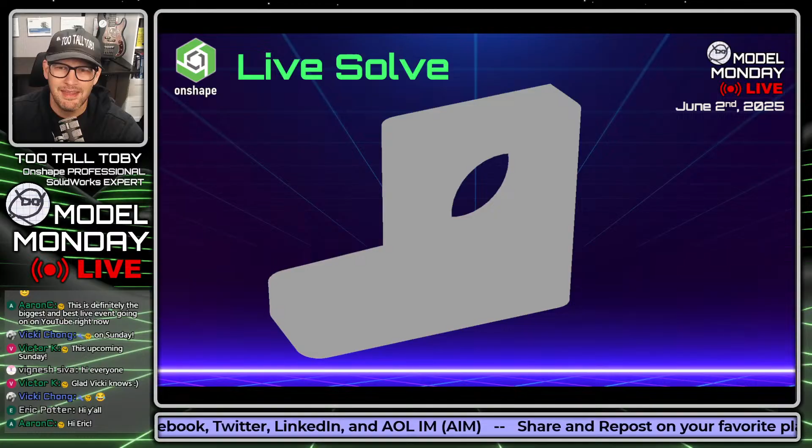Today, we're going to do a live solve. Here's a little preview of what that live solve is going to look like. We're going to do that in the second half of the show.

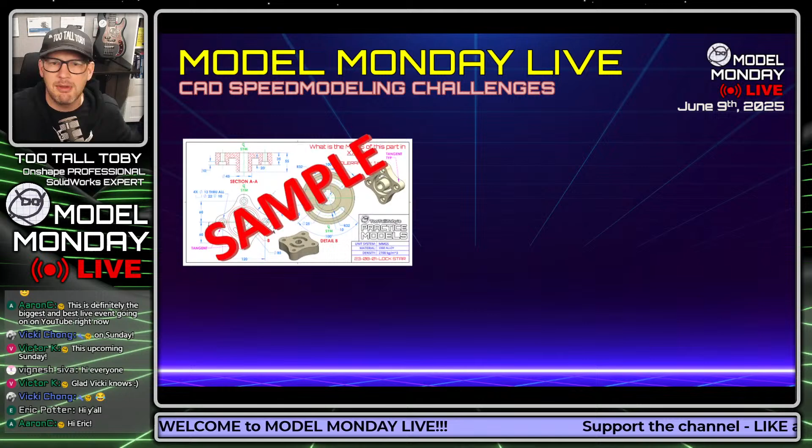Our first order of business is just to remind anybody who's new here how these challenges work. So what's going to happen is I'm going to show you a 2D print, and you are going to try and turn that into a 3D model.

What's up, Marcin? Welcome, welcome. Says hi, all. Hello, hello, welcome. Thanks for joining us here today.

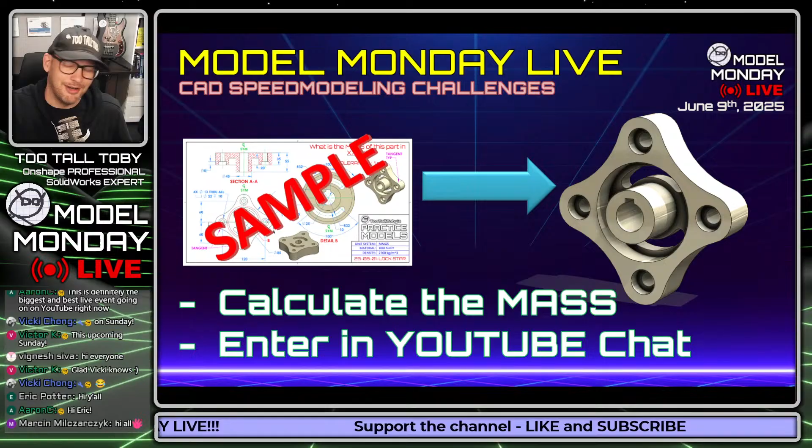You're going to try and calculate the mass of that model, and you're going to enter that mass directly in the YouTube chat for the first part of the show. Then in the second part of the show, we're going to do things a little differently. We'll talk about that in just a moment.

Of course, you can use any 3D CAD package as long as you can input density and output mass. One of the things that makes this channel so novel is that it is truly CAD agnostic. So any 3D CAD packages are welcome.

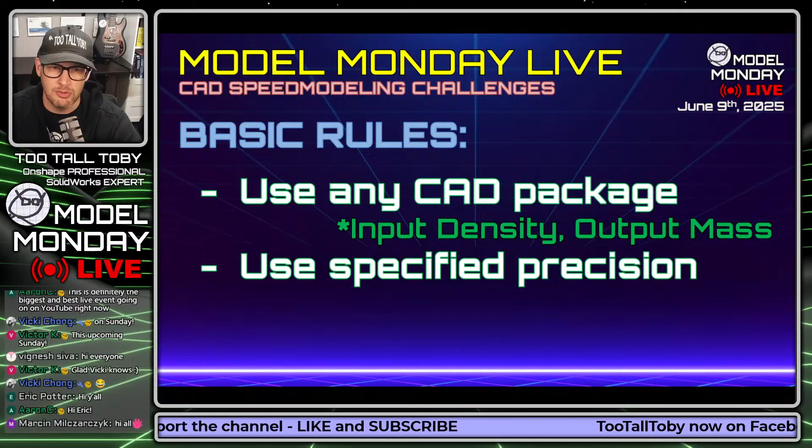And of course, use the specified precision when you answer so that you can get credit for your answer. The first correct answer in the chat will be declared the winner. And the materials that we use here are in inches and millimeters, and they are plain carbon steel, 1060 aluminum alloy, ABS, and red oak.

You got to make sure that you've got the correct density, or else you're not going to get the answer correct when you go to calculate the mass. So make sure that you have those material densities. Maybe take a screen capture of what's on screen right now, and make sure that you have those material densities in your materials library, or at least make sure that you can run a quick custom calculation for these material densities.

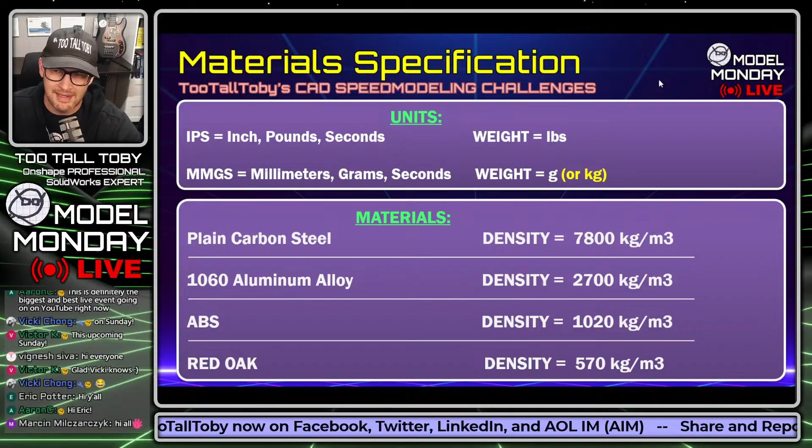There's basically 8 points up for grabs every month, 6 to 8 points up for grabs, 6 to 9 points up for grabs every month. This means that Aaron C., although he's got an impressive lead here over RamBros Workshop, it's really anybody's game. You could come in brand new today and you could still earn enough points to dethrone our current champion. So there's still a lot of time to earn a lot of points here on the 2025 Model Monday Live leaderboard and win the big prize, win the big prize up top.

So with that, we are going to take a look at the advanced rules. This is meant to be fun and good-spirited. Occasionally, I will make mistakes. And, of course, the Ivan exploit is permitted.

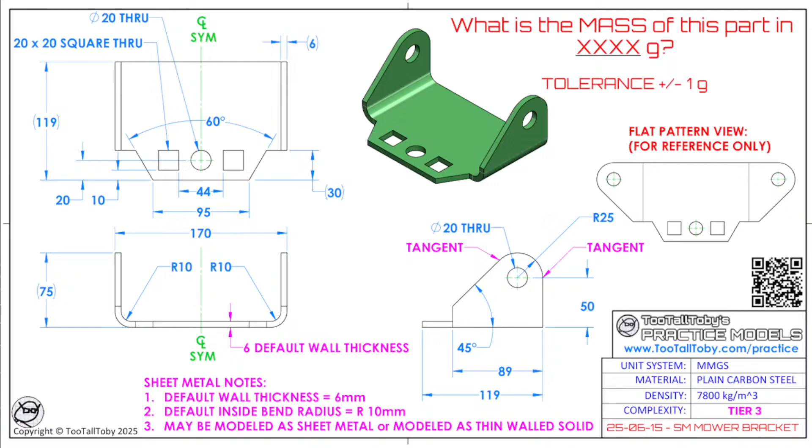I like this song, this is like a classic TooTallToby song. All right, here we go.

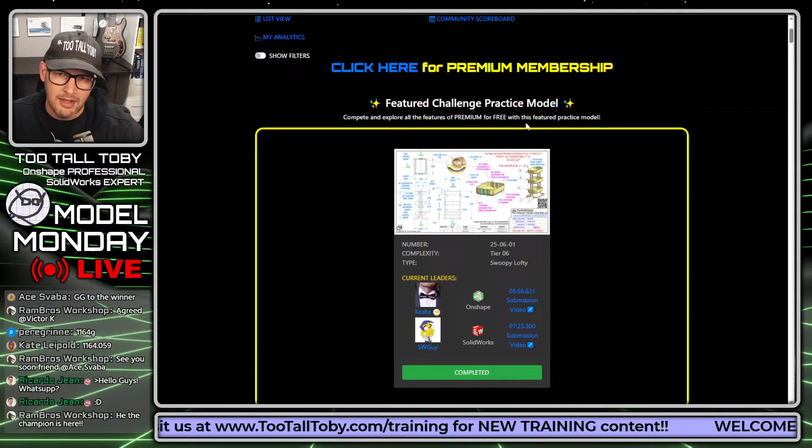So you can see that some of these challenges here up at the very top, it says featured challenge practice model - compete and explore all the features of premium for free with this featured practice model. You can see here we've got these featured practice models, and right now we've got the bath caddy from last week.

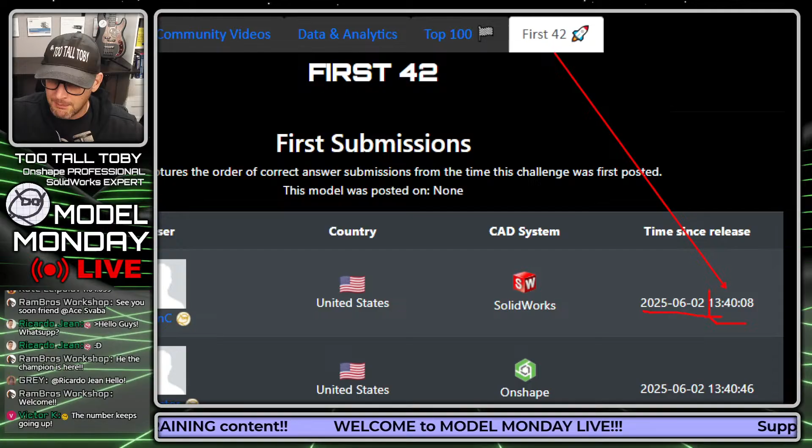If I click on that challenge, we can see here that there are 47 people who have completed this model. There's a section here called First 42, where we can see who has completed the model since it was released. In this case, it was released last week, and we ended up having some people finish it very quickly. Actually, I have a better example of this - I think we ran into a little bit of a glitch because of how I posted the model.

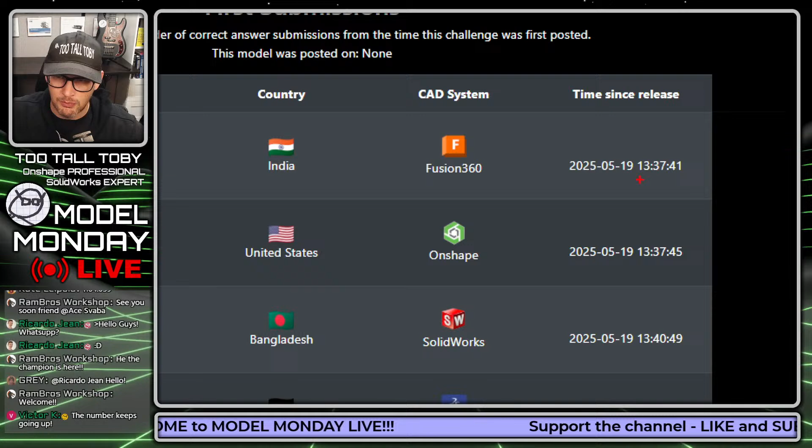But if we look at this one here, we can see it has First 42. In the First 42 here, we can see the time since it was released, and we can see the final time here. Whoops, this one's not showing it either.

But basically what we're able to do is use that First 42 to continue to track live how fast people are completing this challenge. And that's what we're going to be doing here on the second half of the show.

Today, in just a few minutes on the second half of the show, anybody with a free account is going to be able to log into TooTallToby.com and see a new challenge show up here. Right here in the featured challenge practice models, there's currently this challenge, but we're going to have a second challenge show up. Once that second challenge shows up, anybody logged in with a free account is going to be able to compete and attempt to complete that second challenge.

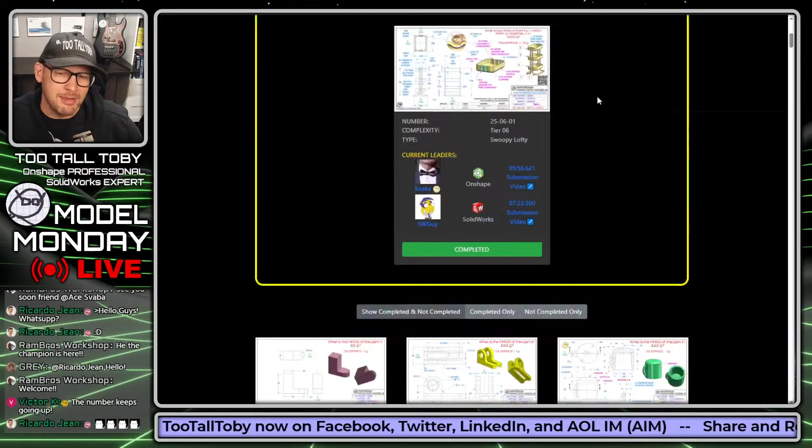It's a great way to continue to work on your CAD skills. Even if you don't have Practice Models Premium, you can still compete in the second half of the show today. So the Practice Models app is just a place for you to go to practice your CAD skills, to continue to refine and improve them. On the Practice Models app, you can do things like complete the model, then complete it a second time and a third time.

You can use the try again function if you've got Practice Models Premium. You can take a look at your data and analytics so you can see how fast you're getting over time as you try to complete this thing a little bit faster. You can see a record of how fast you completed it, a record of what the fastest times are in the community, and you can even take a look at community videos. Some people are getting in here and speed running these models.

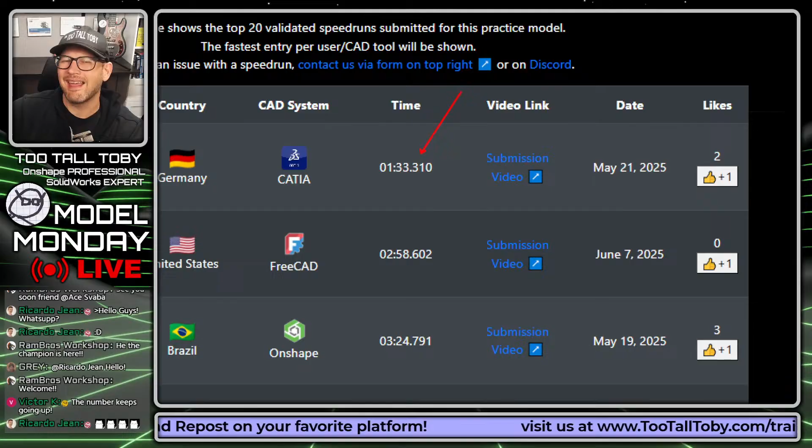For me, it took a total of 17 minutes to complete this model. But for MCGA, Make CATIA Great Again, it only took 1 minute and 33 seconds - that is fast. For Tan the Flan Man, a FreeCAD user, we can see he was able to complete it in 2 minutes and 58 seconds.

And the thing is, it's not just about saying that you completed it, it's about actually showing proof. If there's not a video, there's no proof. Well, these users are actually uploading videos of themselves speed modeling this thing. You can see here Luck07 used Onshape and finished this thing in 3 minutes and 24 seconds. That's absolutely screaming through the software, and I was only able to do it in 17 minutes.

So if I watch this video, it's gonna really put me to shame here for how fast these guys are speed modeling.

Check it out, TooTallToby.com, the Practice Models app, a great place for you to go to practice your CAD skills. You can filter these challenges in the Practice Models app.

At the top of the list, you could say I only want to see the challenges I haven't completed or that I have completed. You can turn on filters and say I only want to see challenges that have to do with sheet metal. I'm big time interested in learning more about sheet metal, so I'm going to try all the free sheet metal challenges. And if I really enjoy the app, I'm going to take it a step further and do the sheet metal challenges for the Practice Models Premium subscription. It's a great way to practice your CAD skills and do things you maybe don't get to do during the day normally. Maybe all day you're working with sheet metal, but you never really get to work on molded parts or machined parts.

Or the other thing you can do is filter by challenge level. You could say I'm going to do all the tier 2 challenges, then move on to all the tier 3 challenges, and then all the tier 4 challenges. That's another way you can use this app to make sure you're getting challenged based on your skill level before you move on from tier 2 to tier 3, as you move up the tiers into more and more complicated models.

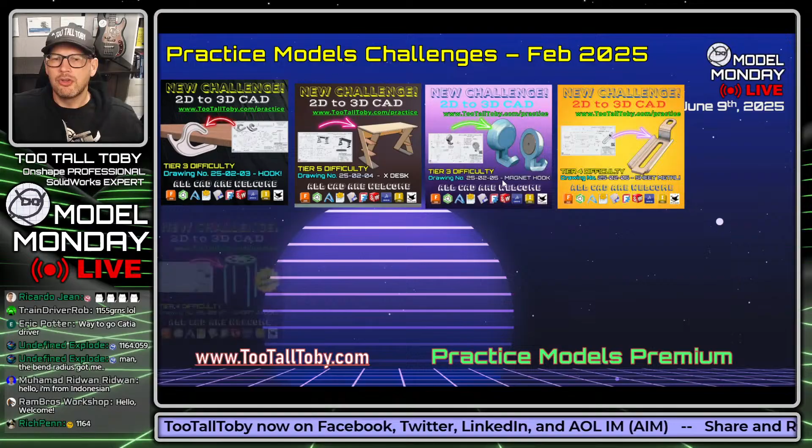We release a lot of content on the Practice Models app, so just a little preview here of some of the challenges you'll see when you sign up. Here you can see some of the other challenges, a lot of variety - some wood parts, some molded parts, some plastic parts, some machine parts.

Lookie is in the chat, says hi all. Hello Lookie, welcome, thanks for joining us.

Some more challenges here, some 3D printed parts, some machine parts. This part here is a part used in conduit, a round conduit box. So some real variety here from the Practice Models challenges.

Definitely helps you get your money's worth out of that app. Over 180 models, we've got a scoreboard, filters, community tutorials, speed modeling videos, and now the first 42, all for the price of a cup of coffee. One single cup of coffee each month could pay for your Practice Models subscription.

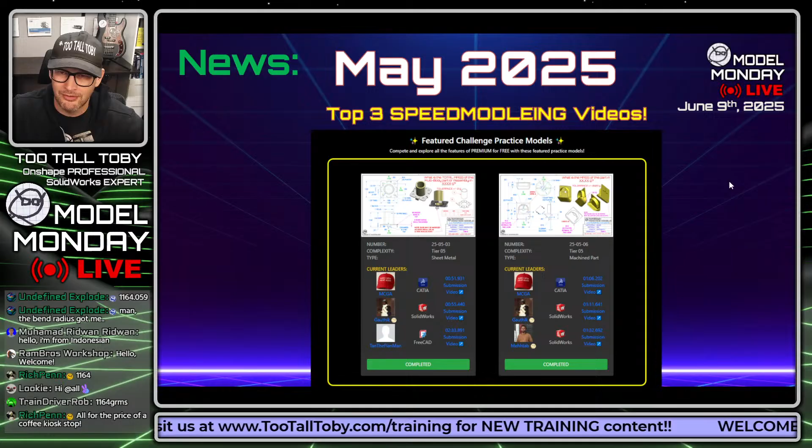Over time we continue to improve the app. We add new features like the featured challenge practice model, something new we added recently. The first 42 is something new we added recently. We're going to continue adding new functionality. The speed modeling and the top 3 speed modeling leaderboard for each challenge is something new we added. We're going to continue adding more and more features as the months go on, and I'm very excited for all the upcoming releases of the Practice Models app.

Train Driver Rob in the chat says, accidentally read the 60 degree as 40 degrees. Yep, that could definitely trip you up, get you the wrong answer. But the nice thing about Model Monday Live is you can answer more than once. You can keep answering until you get it correct. We only look at the last answer you submit in the chat.

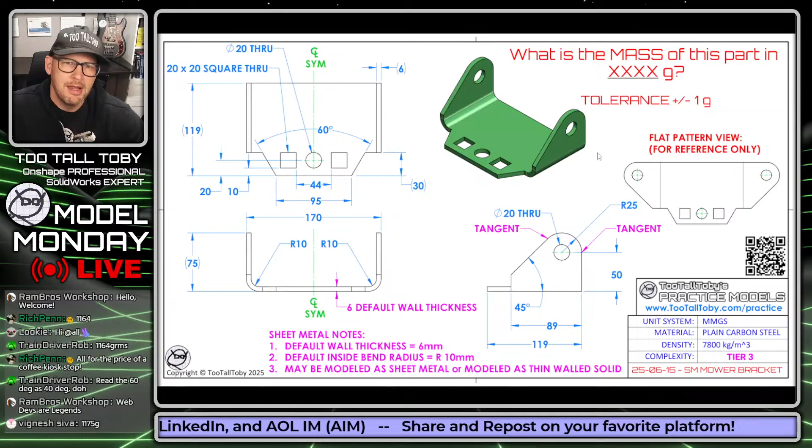We can see that this first challenge was a sheet metal part. If I was trying to solve this, I'd probably first decide on the origin, placing it right on the back side of the part, and right in the center, since the part has symmetry. Then I'd create a simple sketch.

A sketch of two lines: one that comes over at 170/2 and a line that comes up at 75, or maybe a line up at 50 and a second line up at 25. Then I'd use that geometry to perform a sheet metal thin feature extrusion with a wall thickness of 6 and a bend radius of 10, extruding half of that out to a depth of 119.

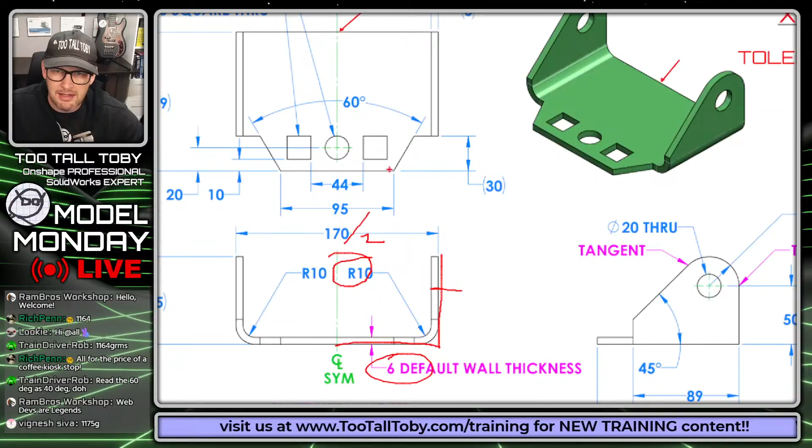Once that geometry is extruded, it's just a matter of adding some cuts. I might add a cut from the top, this 30mm cut, to lop off that corner. Then I'd add a cut over here on this side, so that whole corner is already cut off, and then another cut on this side that would look something like this.

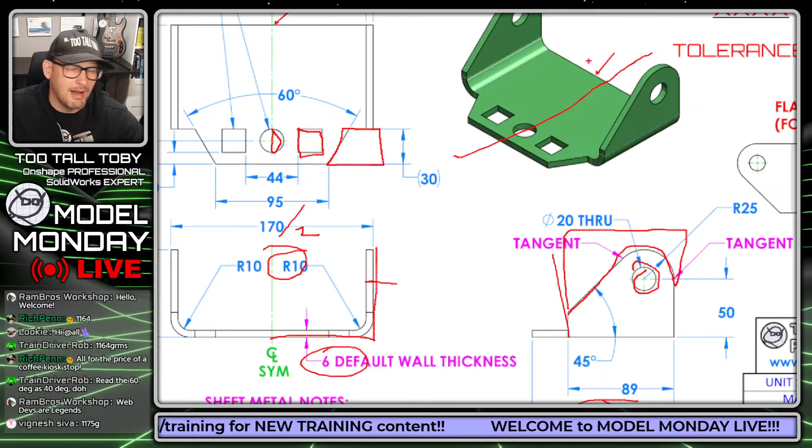Maybe I'd include the hole with that cut. Once that's done, the only thing left is to draw up the circle, or half of it, and draw up this rectangle. That gives me one half of the model done and good to go, and then I can do a mirror-all and mirror that across—hopefully that'll help me come up with the correct answer.

Some of the answers coming into the chat were very impressive and very fast, but only one answer can earn the point for this section of Model Monday Live. Let's see what those answers were.

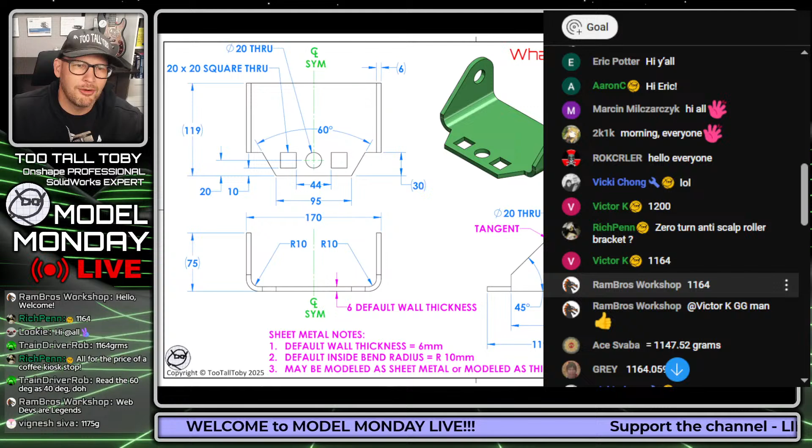Victor K coming in with an answer, 1200, then revising to 1164. Rambros Workshop says 1164, and then 'good game, Victor.' We'll see if Victor got it right. Ace coming in with 1147.5. Nice. Grey coming in with 1164, seeing that number a lot here.

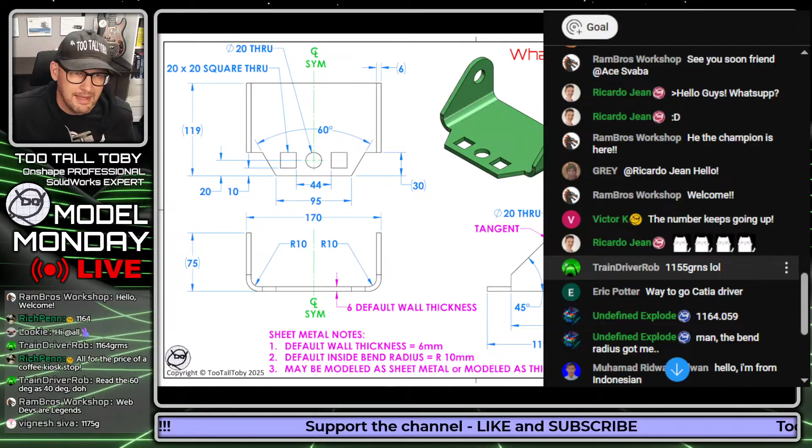Druv coming in with 1164, very nice my friend. Peregrinne coming in with 1164, I like it. Kate Leopold in the chat today, coming in with 1164, I like it. Train Driver Rob with 1155. Undefined Explode coming in with 1164. Let's see what else we got here.

Undefined Explode said, man, that bend radius got me, nice. Rich Penn coming in with 1164. Train Driver Rob revising to 1164, saying he read the 60 degrees as 40. Yep, I could see that ending up happening. And Vignesh coming in here with 1175.

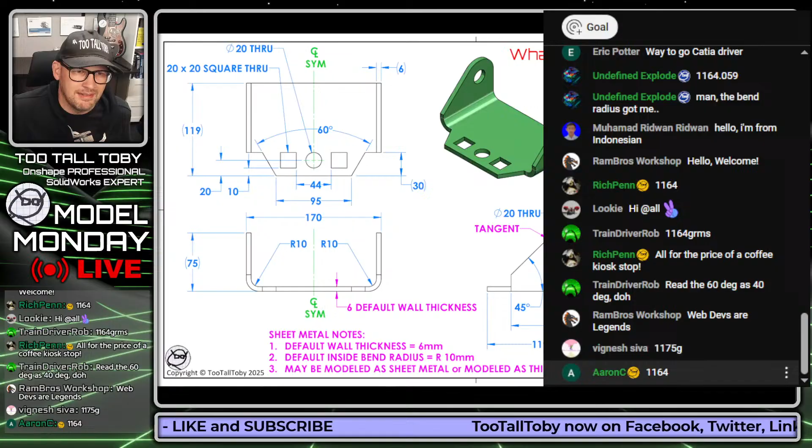Very nice. And Aaron C coming in with the last answer, 1164. And guys, the correct answer is 1164 plus or minus 1 gram.

But we're going to do something special today. We're going to give the point to the person with the last answer instead of the person with the first. No, just kidding, guys.

Just kidding. All right, let's go up to the top here. Let's see who got the first answer correct. 1164. It's none other than Victor K. So congratulations to Victor K.

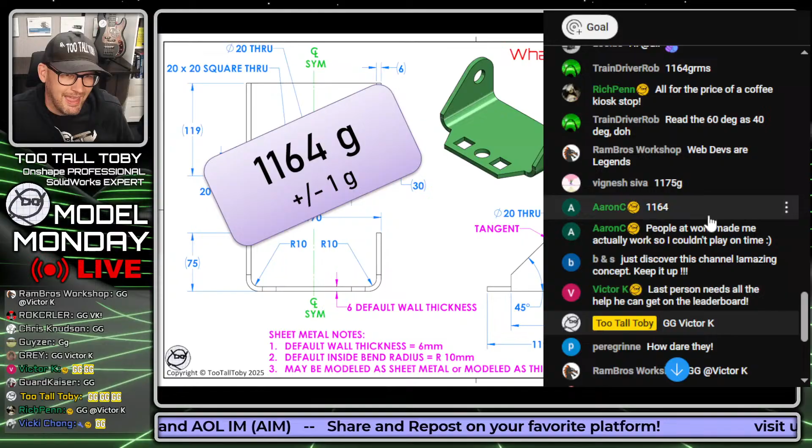Yes, indeed. And Aaron C says, people at work made me actually work, so I couldn't play on time. Oh, brutal. And b & s has just discovered this channel. Amazing concept. Keep it up.

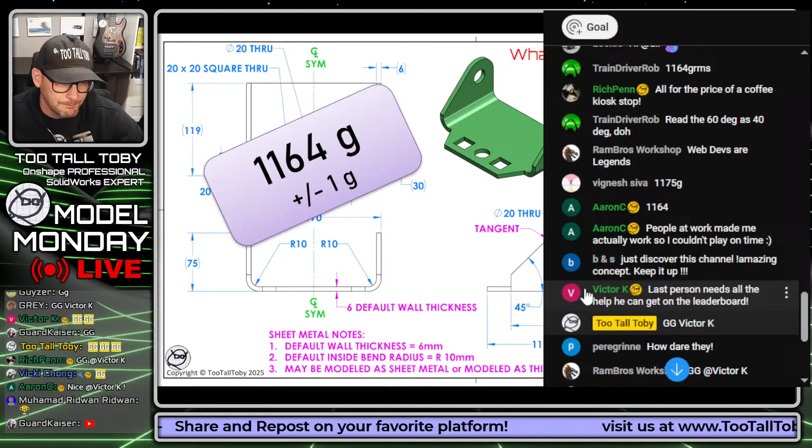Yeah, right. Exactly. Exactly. Well, GG, Victor K. Well done, my friend. And now we are going to move on to the second half of the show.

And it's in the second half of the show that we are going to challenge you to perform an F5 battle, a rebuild battle. We're going to have you guys go to TooTallToby.com. So I'm going to release the challenge right now, but it is going to take just a few moments for it to officially go live.

So we're going to all head over to the practice models website, TooTallToby.com. We're going to all go into that practice models website. So here we go. Let's go into TooTallToby.com. Visit us, TooTallToby.com/practice. Sign up for a free account. And this challenge will go live in just a few moments.

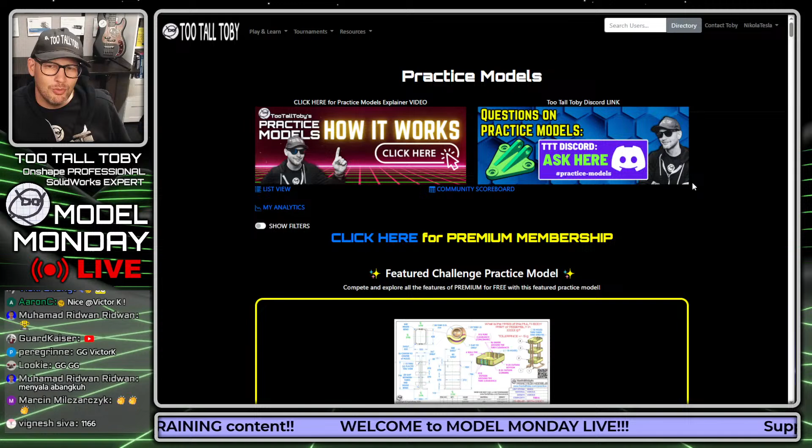If we say click here or get started with free practice models, the new practice model is uploading, and we're going to see that in the featured model challenge here. And I always try to get the countdown right for this one. So here we go. This next challenge is going to begin in 3, 2, 1, go! So if you refresh the page, you should see the second featured challenge is now listed here.

The challenge is now live, and it's going to be up to all of you to get in here and to attempt to solve this. And I'm going to solve this one right along with you. So good luck to everybody who is attempting to solve this here on this episode of Model Monday Live.

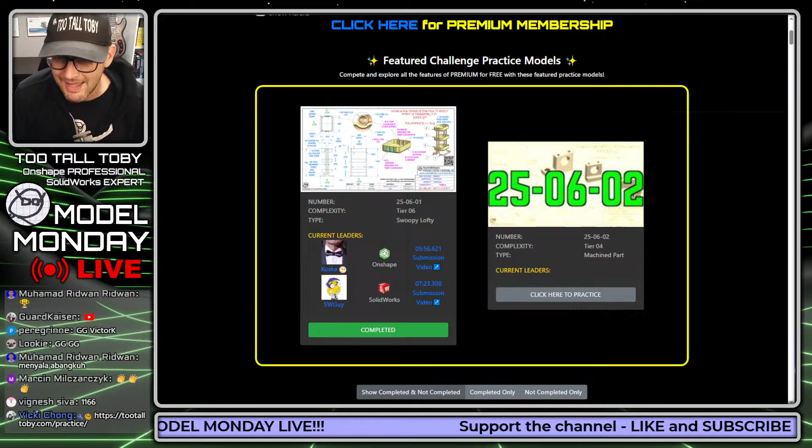And we are now in the second half of the show. And in this second half of the show, I'm going to challenge all of you to solve a model that we just released just a few moments ago. We just released it here. And we do this every week on this live stream, Model Monday Live.

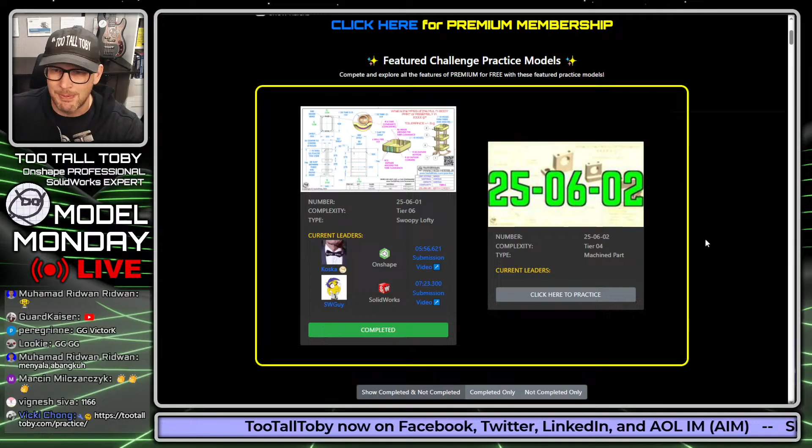You say, click here to get started. You sign up for a free account. And then you're going to see that we have this featured challenge practice models up here at the top of the screen. And the brand new featured challenge practice model that we just released is this one here, 250602. So today I'm going to solve this using Onshape.

So I'm going to get my seat of Onshape ready here. I'm going to click here to practice. We can see that currently no one has solved this model. So we're going to try to be the first to complete this practice model.

So here we go. This challenge begins in 3, 2, 1, go. So the question here is, what is the mass of this model? We can see that the clock is counting down, and we're going to enter that mass right down here.

We'll also notice that this challenge has a title block with a material and a material density. One of the things I really like about the Practice Models app is that we can open in a new window, and then just move this window around to make it easier to have our CAD system on one screen and the challenge on another.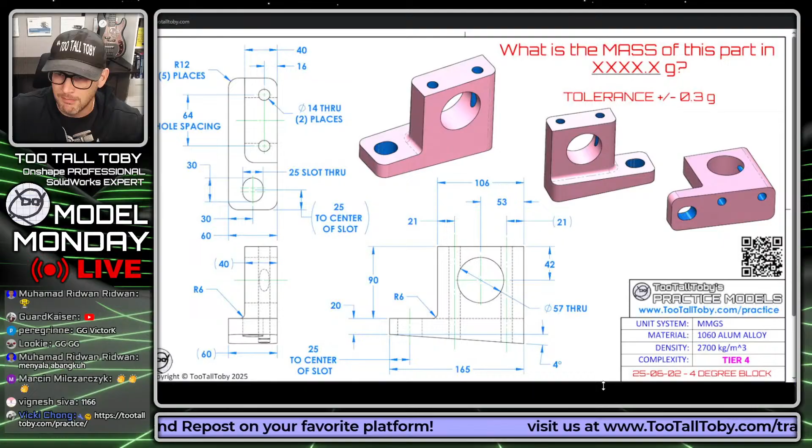We can see that this challenge is a machined part, and that it's not symmetric. There's no centerline symmetry. So when it comes to the location of the origin on a non-symmetric part, it becomes a little more arbitrary.

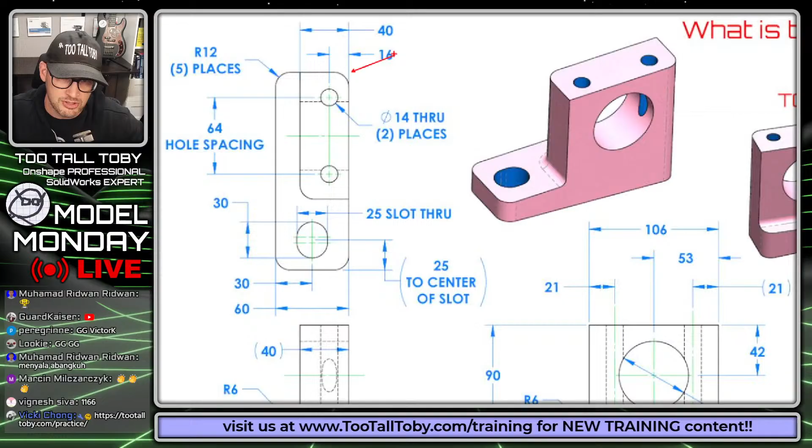Usually what you'll do is, if you know the part is going to be machined, you'll put the origin on one of the corners, because that'll make it easier for the machinist to zero out their machine. So maybe we'll put the origin here, or maybe down here. I tend to work from the upper left and work my way down, so I'll probably end up putting the origin on this corner.

Once you decide on where the origin is going to be, the next thing you want to decide is how your sketches are going to be constructed for this model. I think what I'm going to do is create a sketch that looks a little something like this.

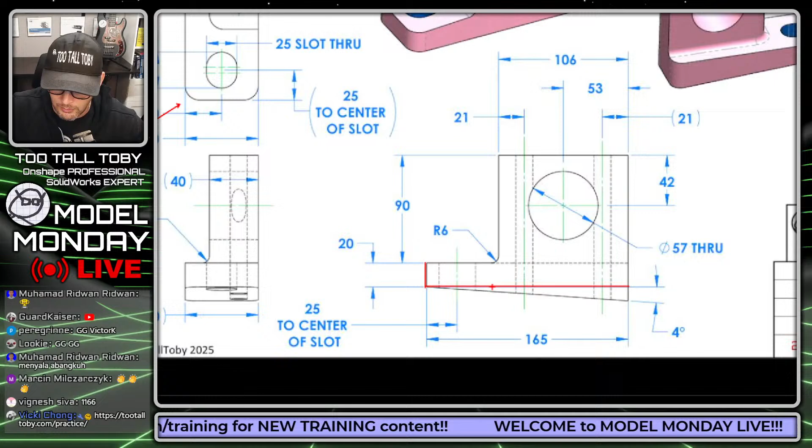Coming down at an angle here at 4 degrees. I think I'll create a sketch like that, and that'll be my first sketch. Then I'll take that sketch and extrude it out to 60.

Then I'll create a second sketch here that looks a little something like this. Maybe I'll include the hole in that second sketch, maybe not. Then I'll extrude that out to this depth here of 40 millimeters, and that's going to give me the foundation of this design.

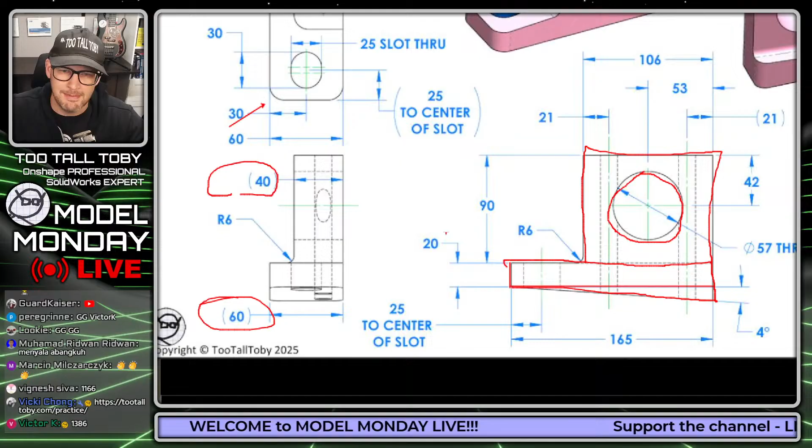The rest of the design is really just going to be some cut extrudes. So not too difficult of a model. It's tier 4, really right between a tier 3 and a tier 4 model, right on the cusp of those two.

So let's get into it here in Onshape and see how we would solve this thing. Again, all of our users here on Model Monday Live are trying to solve this at the same time, so it'll be interesting to see if I can get this answer in before some of them.

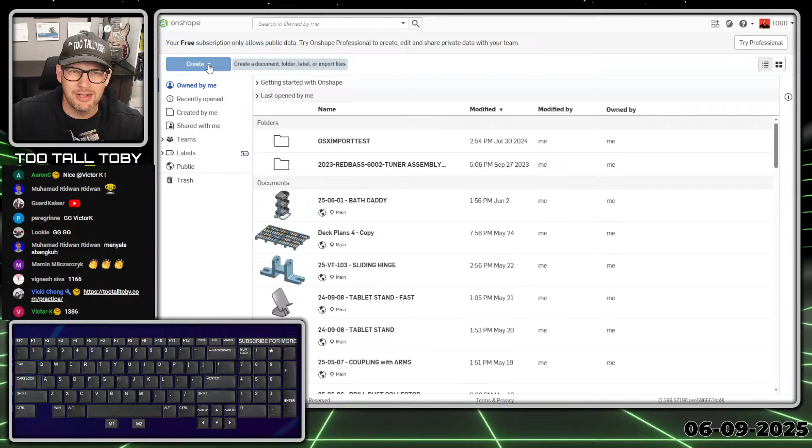So we're going to go here to our keyboard cam. We're here in Onshape, and let's get this party started. We're going to say create a document. I'm going to call this 25-06-02, and I'll call it 4-degree block.

This is going to be a public document, so if you have access to Onshape, either the free or paid version, you could look this up in the public space and see what my feature tree looks like. I'm going to come up here to my workspace units from this hamburger menu and make sure I'm working in millimeters and grams. Very important to work in the correct units.

Then I'm going to follow my game plan. Front plane, S key, begin a sketch, N key to get normal, S key to begin a line, and I'll single click here on the origin, move straight down, then single click in the background, let go of my mouse, and type in a distance of 20.

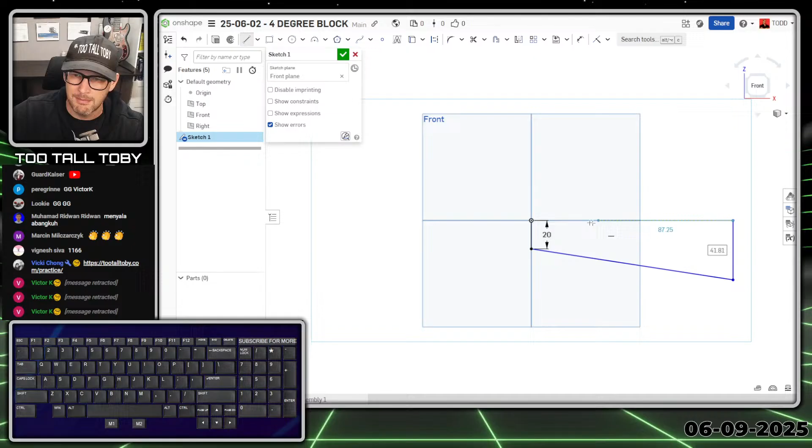Then I'm going to move my mouse down here at an angle of 4 degrees, not sure exactly what it is. Single click. I'll move my mouse up here until I'm horizontal to the origin, single click, then move back to the origin and single click again. Then I'll let go of my mouse and type in 165 for the width of that block.

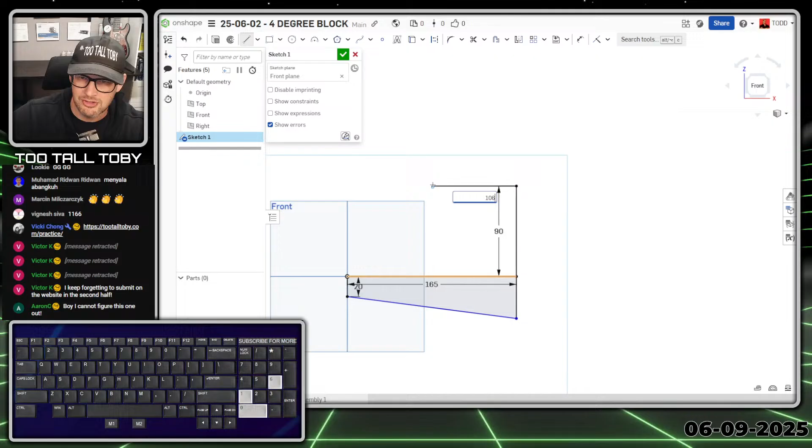Originally I said I would make that second sketch as a separate independent sketch, but in Onshape there's no need to do that. I can just create a second sketch right here, create a line that comes up, type in the dimension 90, enter. Then create a line that comes over this way, single click, type in 106, enter, and create a line that comes down, including that geometry in this first sketch.

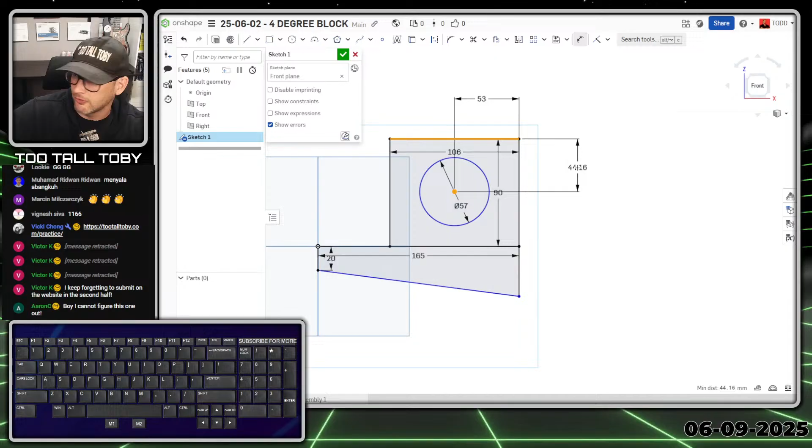Really, I could also create the geometry for the circle here in this first sketch. So create this circle here that has a bore of 57, and then create some dimensions to that circle. It doesn't mean I have to extrude all of these at the same time, but it might be smart to include this geometry in this first sketch, created at a distance of 42.

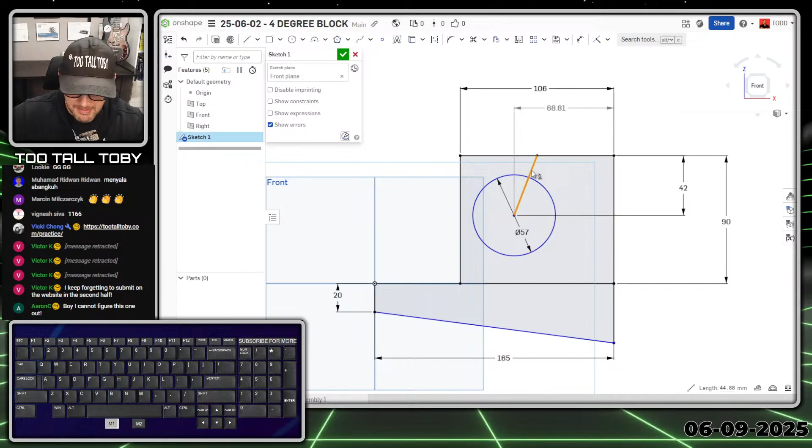Now, this 53 dimension, I think it stands to reason that that's probably going to be centered on this block. So if I was a designer, I'd want to include that 53 dimension in the design, but always want it centered on that 106. So maybe I could right click on that 53 and say change to a driven dimension. Now I can move this all around, and then I could draw in a construction line, or even a solid line, from the midpoint to this point here, and make that line vertical.

So there's a little trick you can do in Onshape: right click on a dimension and say change to a driven dimension. That way, if this dimension were to change to 120, it's going to update, but it's a driven dimension because of that vertical relationship to the origin. Just a little extra trick there if you're following this Onshape tutorial.

Final thing we need to do here with this sketch is just add in that 4 dimension. You'll notice up here that the sketch is currently under-defined, meaning it's got this little minus sign, so something in the sketch is still loose. We can see that loose thing is the angle for that 4 degrees.

So, S key dimension, create a dimension that goes from this line to this line, and that dimension is going to be 4 degrees. Now that little minus sign goes away. There we go, no more minus sign. That's what we want to see. We always want a fully constrained, fully defined sketch in our tree. That means our sketch is going to be predictable, and that's definitely something you should always be shooting for. Get rid of those little minuses.

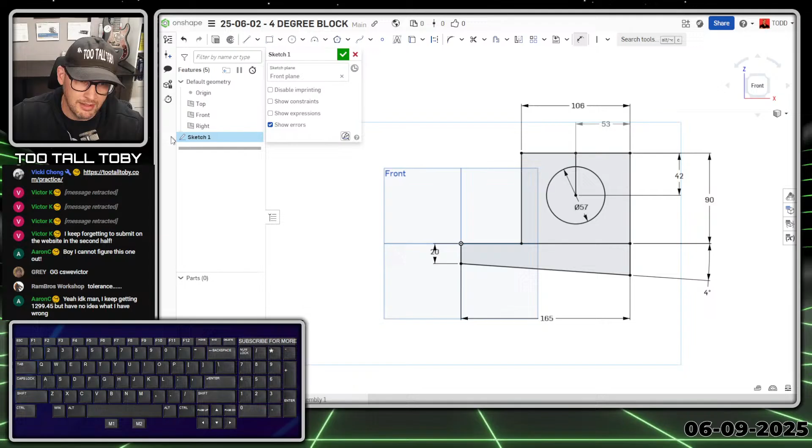Now I'm going to press S key extrude, and currently you can see the whole thing is extruding. If I press the space bar on my keyboard, that clears that whole extrusion. Now I can click on this face here and choose to extrude that out to a depth of 60 millimeters. Boom, there we go. That gives us that extrusion. And then I'm going to hit the green check mark.

Now I could extrude it out this way to make the next step a little bit easier, but this is a tutorial, so I am going to intentionally extrude it out this way. What I'm referring to here is now my sketch. So I'm going to go into the tree and click on the little eyeball here for sketch 1. Now my sketch is not on the correct face, because I need that sketch to be out here on this face.

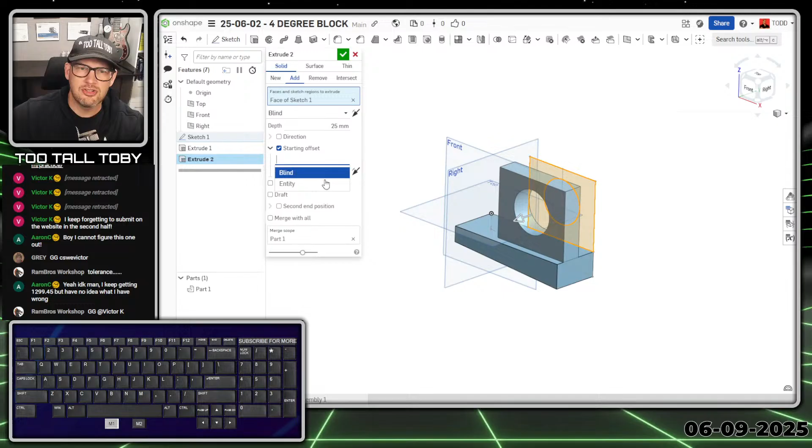Well, what I can do is choose S key extrude. I can choose this region here to extrude, and then for the starting offset, choose entity, and then choose this face here. So basically I'm saying take that sketch, project it onto that front face of the model, starting offset this face up here, and now I can do my extrusion. Let's do a reverse direction, and that extrusion is going to go to a depth of 40, enter, and that's going to be an add in Onshape.

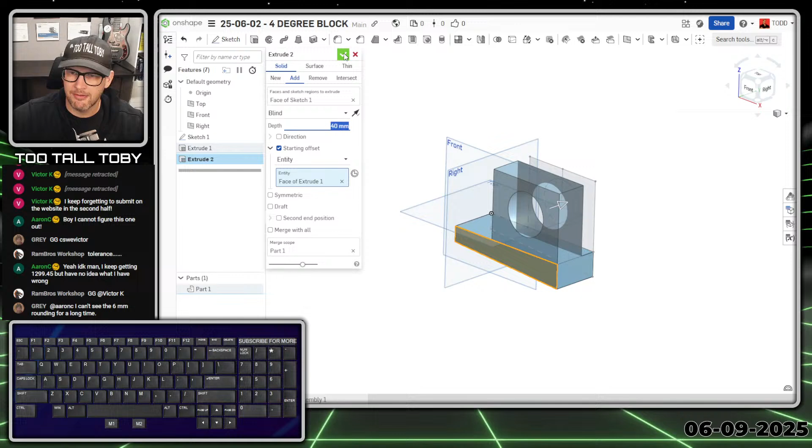We're going to add that geometry to the block there in Onshape on that front face. Now I can hit the green check mark, and boom, there we go.

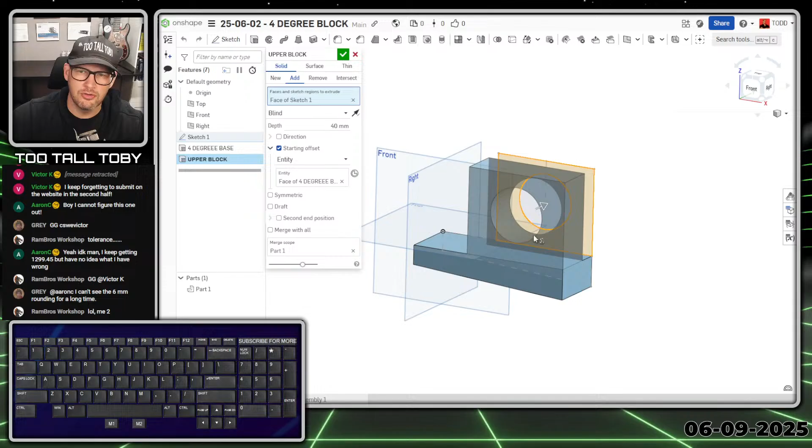Now if I wanted to separate those features, like maybe this one would be the 4 degree base, and then this one is going to be the upper block. So I'm using Shift N to do that rename. Sometimes what I like to do is have each feature be explicit. So I could double click here on this upper block, and then I could choose to also extrude that circular region. So there's that upper block.

And then I could once again do an extrusion. So here I could just go S key extrude, and then I could pick this circular region, and I could say I want that to be a remove through all, and then I'll reverse the direction of that. And there we go. The reason you might do that would be for configurations.

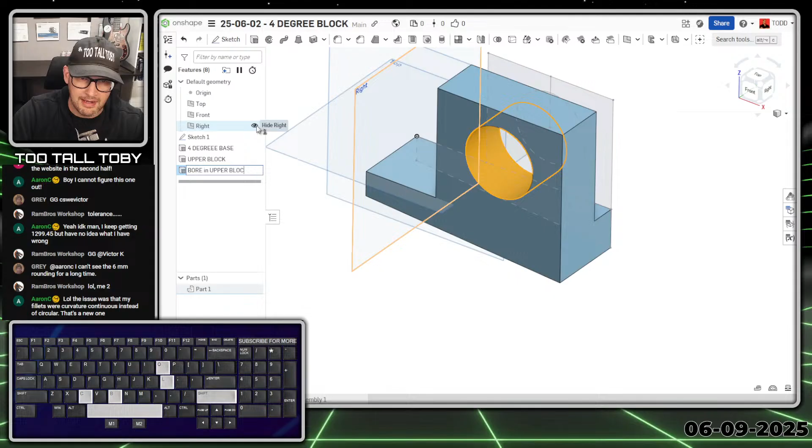So now if I go over to the tree here and I do Shift N, I could have a configuration where the bore in upper block is turned on, meaning unsuppressed, and then I could have a different configuration where that is suppressed. So you can turn features on and off temporarily in different configurations, and that's usually the motivation for creating an explicit feature rather than just including everything in one single feature. So just something to think about as you're getting deeper and deeper into the world of 3D CAD.

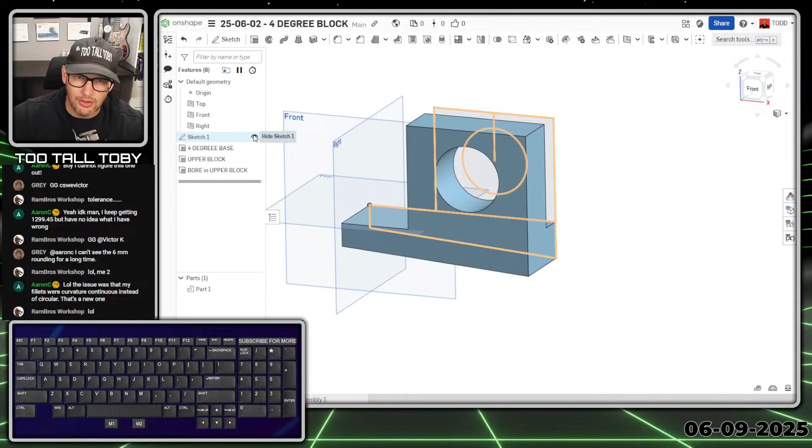So now I can hide this sketch 1. I don't need that sketch 1 anymore. And now I'm ready just to go through and add in those final cuts.

So I'll start here on this face, S key, begin a sketch, N key to get normal to, S key, I'll create a line here, and then maybe I'll do an S key and drop a point here at the center of that line, because I want to define the location of that slot to the center of the slot at a distance of 25, and then the location of that slot from this edge of the part to the slot at 30 millimeters. And then I can hit escape, I can click on that line, and then I can choose this flyout menu for offset.

And I can choose slot. So once we choose that option for offset slot, there you see we're able to take that geometry and turn it into a slot. I'm gonna double click here on this diameter 20 and change that to 25 and enter.

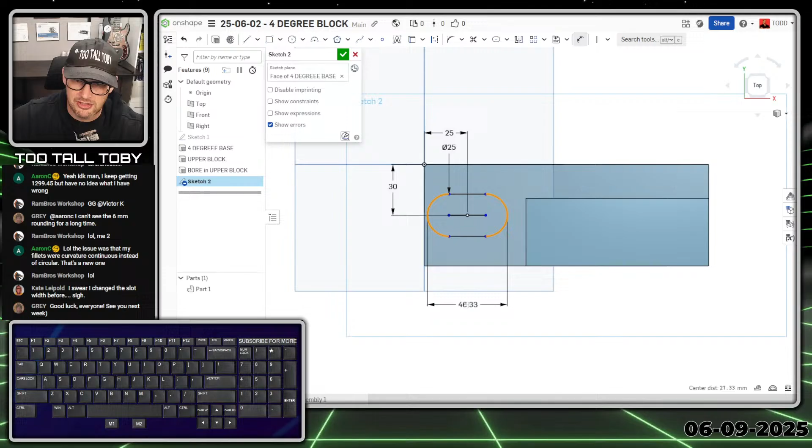And so now the final thing I need to do is just define the length of that slot. So S key dimension, and that's gonna go from this arc to this arc. That gives me the tangent in Onshape, and that is gonna be 30 millimeters. So S key, extrude, remove, through all, enter. And then I'm gonna rename that one, so Shift N, that'll be called slot through.

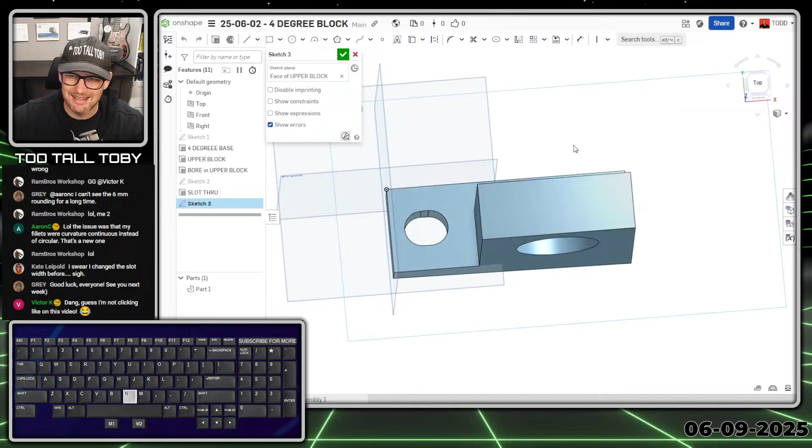And then finally, these holes up top here, or almost finally, S key, begin a sketch, N key to get normal to, S key. Here what we could do is we could use the little trick of creating lines instead of dimensions. So I could begin a line command here, single click, move my mouse up in this direction, single click, and then type in the distance here of 16, enter, move my mouse over in this direction, single click, type in the distance of 21, enter, move my mouse over in this direction, single click, type in the distance here of 64 for the hole spacing.

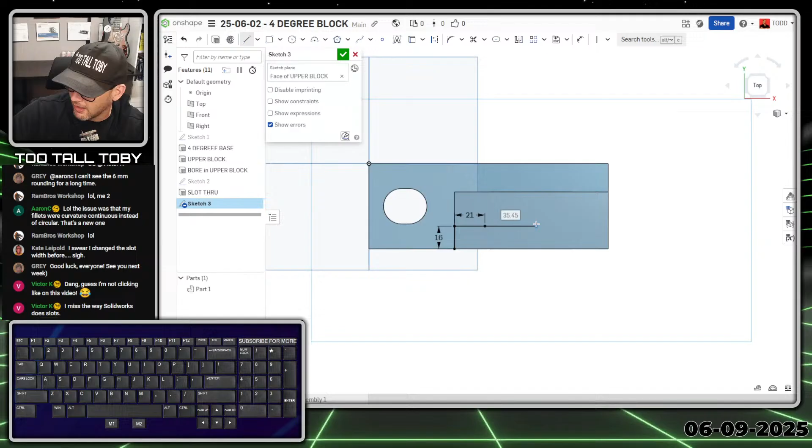So instead of going through and adding dimensions, you could do it with a series of lines and then S key circle, and we could single click on this point here, drop in a circle, and then single click on this point here, drop in a circle, and type in a dimension of 14, enter, and then hit escape, pick the one circle, pick the other circle, and then press E on your keyboard for equal. And boom, there you go, you've got those 2 circles.

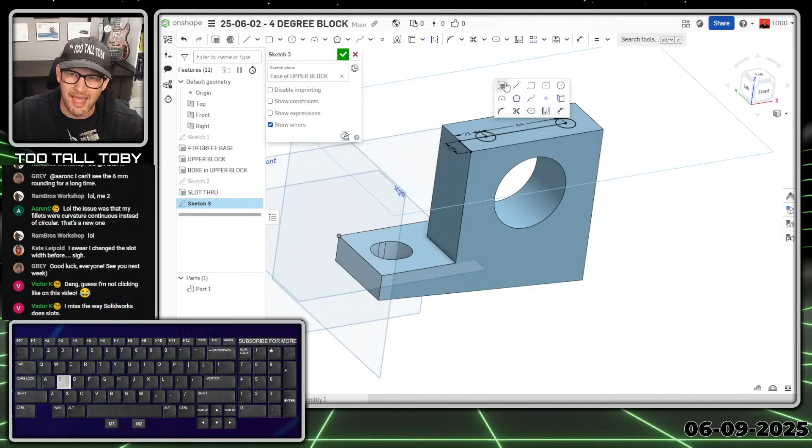And what you learn when you practice a lot, when you use the Practice Models app, or you just do a lot of practice, is you learn that you can then do S key extrude, and then you could say remove and through all, and you see the Onshape is just ignoring those lines.

So we're getting exactly what we want. Now, how do we know that? We just practice, and then you realize Onshape doesn't even care that there's a line ripping through the sketch. It just takes the circles and gives me exactly what I want. It's a perfect application for those lines as dimensions.

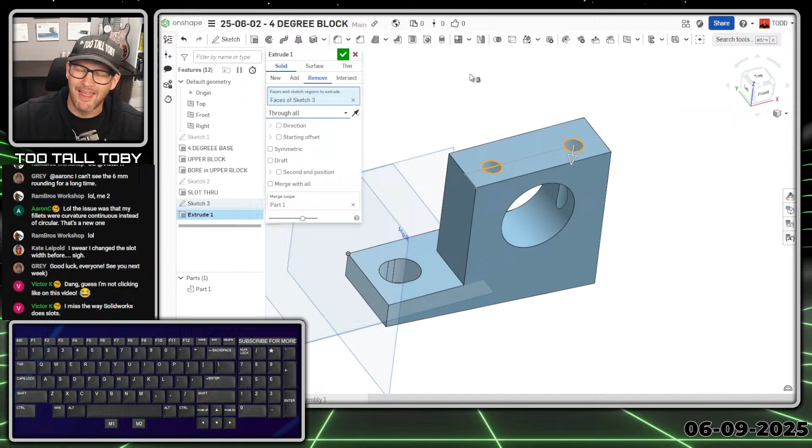So we hit the green check mark, and there we go. We've got those holes running through that part. We could call this one 2 mounting holes, or just mounting holes. Shift N to rename in the tree. Always good to rename your features.

And then finally, we're going to be adding in some fillets here. This is a little trick I did with the fillets that's kind of interesting. I could go in here to do my fillets, do Shift F fillet, right click on this edge, and from the right click choose select, then select parallel edges.

What's interesting here is that it goes around and gets most of the edges that I want, but it also gets these edges down here inside of the slot. Now, the question is, does that matter? Does it matter that I get those edges? Let's find out.

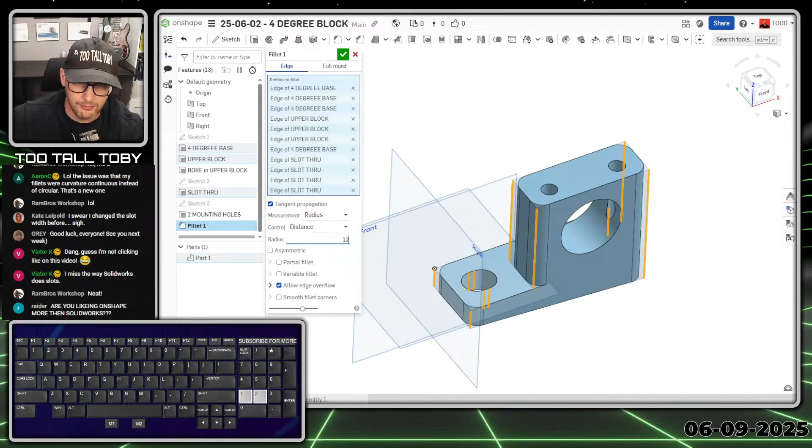Let's change our radius for those fillets. It looks like that radius is radius 12, 5 places. So radius 12, then 5 places. I don't need this edge here—that edge can be cut straight—and I don't need this edge here either, also cut straight.

But you can see I have an additional 4 edges selected here, so there's a total of 9. 1, 2, 3, 4, 5, 6, 7, 8, 9 edges selected because it's getting these vertical edges as well. But if I hit the green check mark, I still get what I want. These edges are vertical, but they're already tangent to another face, so does it really matter that those edges are part of that fillet?

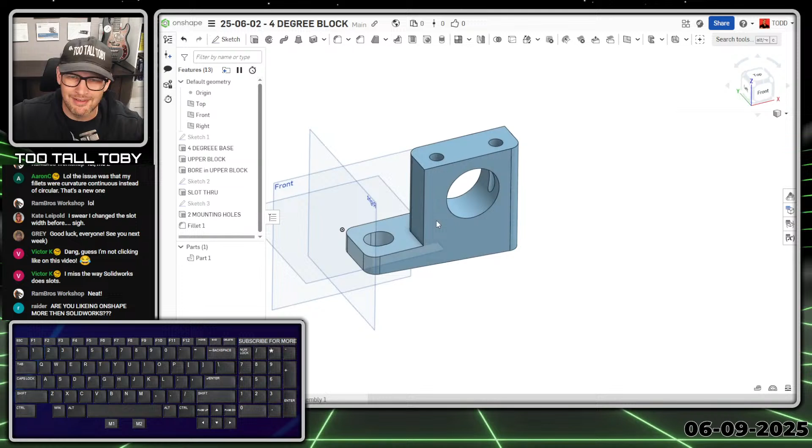I don't know, I don't think it really does. I could see it maybe coming up later. It's a little bit sloppy for me anyway—I don't really like having those extra edges on there. So if it was me, I would probably go through and get rid of those, hit the X, and remove those 4 so I only have those 5 edges. It also makes it easier to count when there's only 5 in there. But I just thought that was interesting as I was going through.

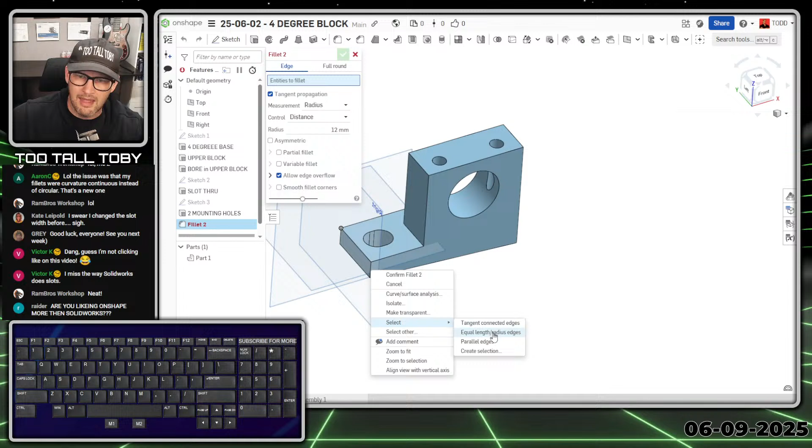It's a good reminder that when you jump into the fillet command, there's a multi-selection tool available. It's pretty useful: Shift F fillet, right click, select, then parallel edges. There's also an entire section for create selections where you can get into deep tools to define your selection criteria. There are some pretty cool additional capabilities when doing selections in Onshape, but we'll save that for another tips and tricks video.

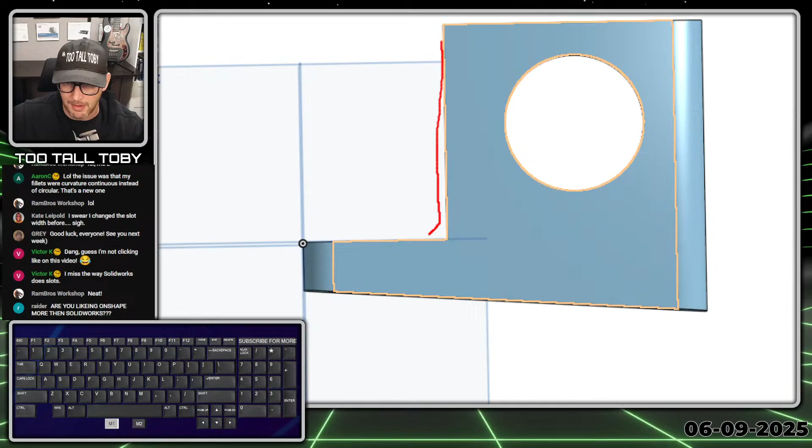So that gives me those 12mm fillets, and the only thing I need is for the toolpath. When you're machining a part like this, you're going to have some type of tool coming in either from this side or the top, and that tool probably won't have a straight bottom—it's probably going to be a rounded end mill. That rounded end mill is why we end up with those radii in the corner, with a radius here from that rounded end mill.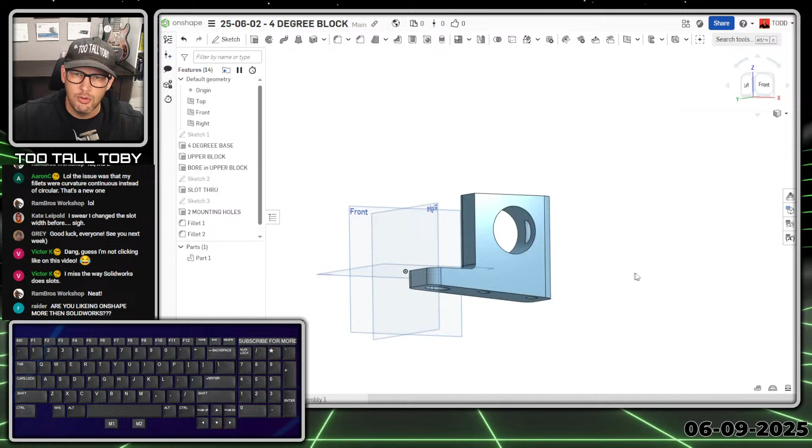So if we go here to our fillet command, S key fillet, we're going to emulate that by ripping a fillet around this bottom edge of the part. That fillet is going to have a radius of 6, enter, and there we go. We can press P to hide our planes—now they're hidden. We can do what's called the final spin, looking at this thing from the top and bottom and all over, and then finally we can maybe change the color of some of these things.

So we could go down here to the name of the part. We could right click and say rename. It's going to make it useful when you add that part into an assembly. So we're going to rename that to 4-degree block, or angled block might be a good name too, in case the 4 degrees changes.

Then we go to that part name again, right click, and say edit appearance. We could change this to match the appearance of the part from the customer. Customers always like it when you try to match the appearance to what they gave you for their physical parts.

And then finally, we can right click on the name of that part again. And from the right click here, we could say assign material. This material is going to come from the TooTallToby library of materials. We do have a video on this, I'll include a link in the description. This material is going to be 1060 aluminum alloy, and we hit the green check mark.

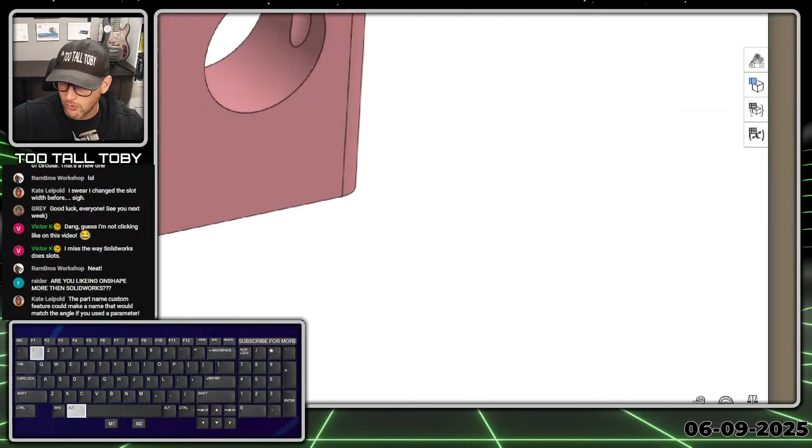Down here in the corner, we've got the option to measure the mass of this part in Onshape. So we're going to measure the mass of this part. We click on this part here, 1291.5 grams. If you click on it, you can expand it out and even get more details about it. But 1291.5, let's see if that works for our challenge here.

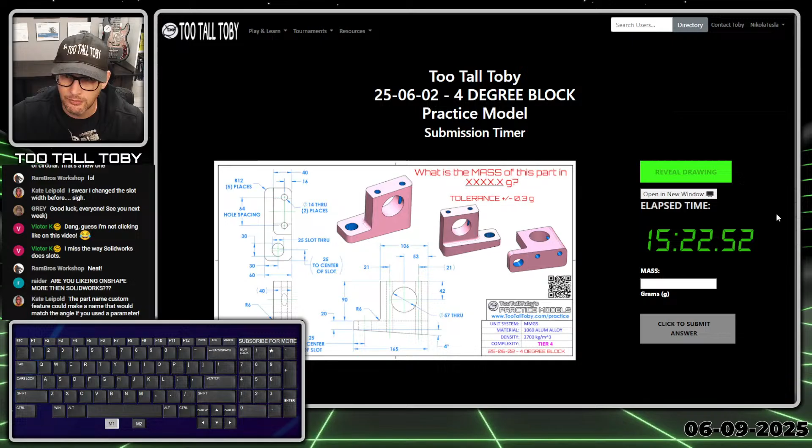So we go back into the challenge here, and we're going to type in 1291.5 and enter. And oh yeah, we did it. We got it correct. Anytime you see that purple box show up, that's always a good sign, that means you did it correct. So congratulations to us, we did it. And the correct answer, 1291.5, was within tolerance. We did it in 15 minutes and 27 seconds.

So what do you think? Did anybody out there watching in the chat do it any faster? Let's submit this so that we get 1 point on the community scoreboard.

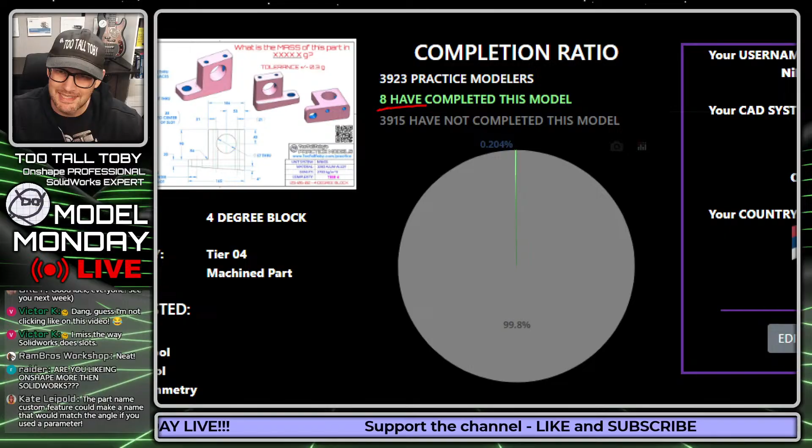And let's go down and take a look. Oh, look at this, 8 people have completed this challenge. Very nice, 8 people have completed this challenge. So we go down here to our first 42 board, and we can see that our first person to finish this challenge was none other than CSWE Victor.

Victor K, the world champion of 3D CAD speed modeling, coming in today with a clean sweep on the Model Monday Live points. He earns the point here for finishing this model in a mere 4 minutes and 32 seconds using Onshape. Wow, Victor K, what is the secret? That is fast. Good job, my friend.

And we see GREY here came in using SolidWorks, 5 minutes and 47 seconds. Very nice. And RamBros Workshop coming in here using Fusion 360 from India, was able to finish this challenge in 6 minutes and 40 seconds from the time it was released. We have PKerins coming in here, 8 minutes and 38 seconds. Well done. And we see here Aaron C., 8 minutes and 54 seconds.

Now, this isn't necessarily the time that it took them to finish it. This is just the time from when the model was released. We released the model here at about 1:30 p.m., and this is when these runners finished that model.

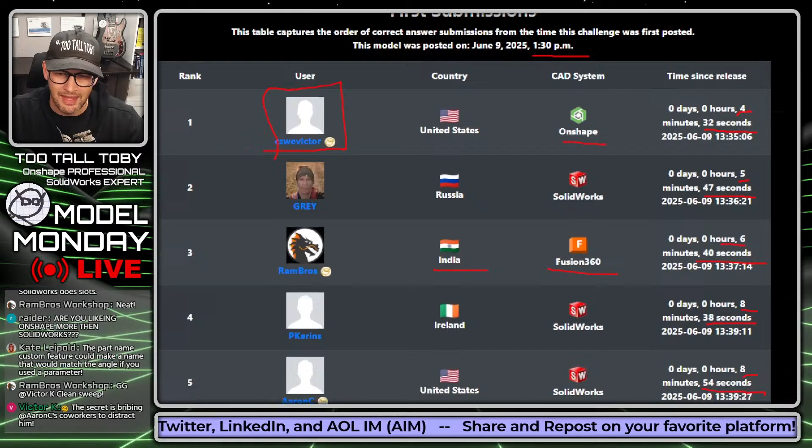And of course, we see also down here, we've got the CAD Queen. I think that's Kate, right? The CAD Queen here, Leipold 340, finished it in 9 minutes and 4 seconds. Very nicely done. And Undefined, using Onshape, very nicely done. And Undefined Explode here, 12 minutes, 54 seconds. Very nice. And then Nikola Tesla, bringing up the rear, that's my account, 17 minutes and 42 seconds. So that is the first 42 for that challenge.

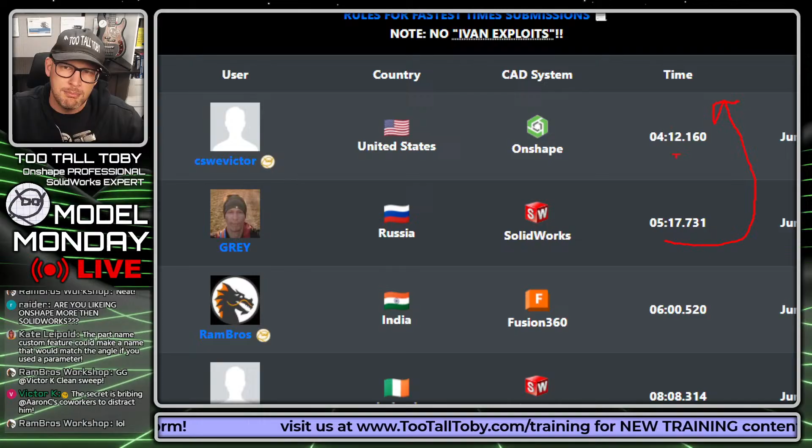You'll notice here that the top 100 might reflect slightly different times because the top 100 is based on when you click the start button to when you click the finish button, and that time can be improved. You know, Gray could come back in here now and try to run the model again, and then Gray could actually get a faster time than Victor K, so he would move up on the top 100 board. But the first 42 is immutable.

Once you solve it from the time it's released, that's it. So Victor K will always be at the top of that first 42 leaderboard. So congratulations to Victor K.

Well done, my friend. And the question everybody's wondering in the chat is, what do you need to do to beat Aaron C? We see that Aaron C is down here in 5th. Victor K was in 1st. What do we need to do here to beat Aaron C in these challenges?

The answer in the chat is the secret is bribing Aaron C's coworkers to distract him. Yes, that is an excellent secret there to take those points away from Aaron C.

But congratulations to everyone. Now that I've got the solve complete here, I can go into data and analytics, and then down into my tutorials, and I can post a tutorial. This is something a little bit newer here in the Practice Models app. I can specify what CAD system I'm using, what language I'm using, and include a link directly to the YouTube tutorial. So if anybody out there is into creating CAD tutorials, we've got a whole library for you to create CAD tutorials, and then you can post your tutorial right here, and it'll show up on the first tab in community videos. So under community tutorials, that's where those tutorials will show up when you post them in your data and analytics.

So that's it for our second challenge here today. I want to thank everyone for competing, and huge GG to none other than Victor K, who got that one correct. Got both of them correct today, right? Victor K, well done, my friend. Well done. Guys, put a GG in the chat for Victor K.

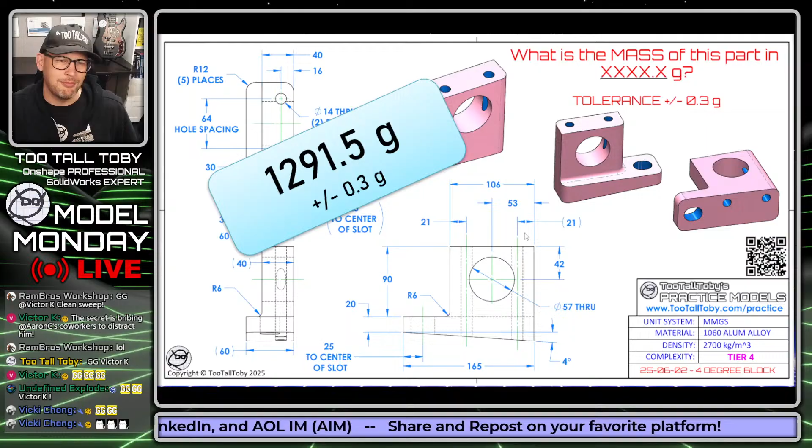And so that's it for our second challenge. 1291.5 was the correct answer for that 4-degree block. Congratulations to our winner today, Victor K, sweeping. Well done, and congratulations. And thank you, of course, to all of you out there, the most amazing chat ever. We couldn't have these awesome live streams without all of you.